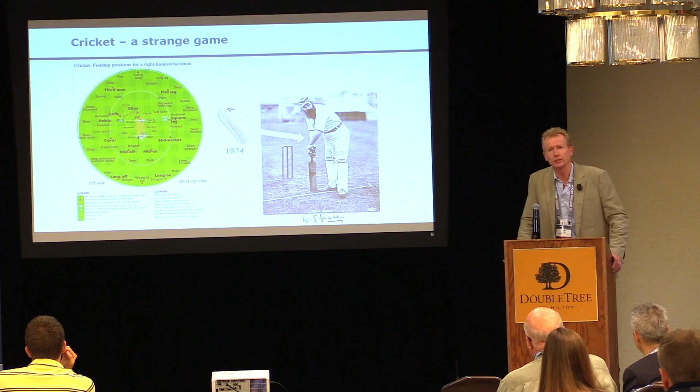Well, to give perspective on cold recycling, this cricket started — you can see the date down the bottom there — about the 1600s, the game first started. And it was only in 1874 that they decided to equip themselves with some protection, the cricketers. But what I'd like to highlight is that it took 100 years before they decided it would be important to maybe protect your brain as well.

It's a little bit like cold recycling: at the start of the technology, it was all about protecting the assets, and the assets were judged from an economic point of view. It's now that we've got our thinking caps on, and if we look at some of those earlier presentations today, it's fantastic to see the developments in research and implementation of the technology.

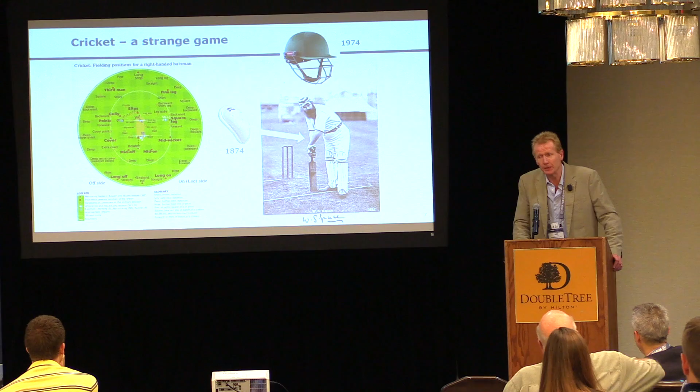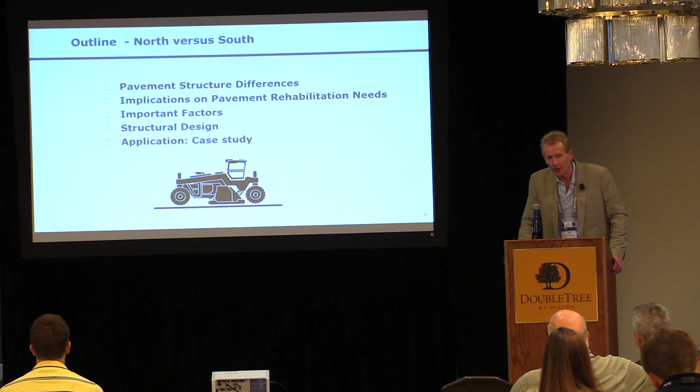So briefly, what I would like to cover is some of these bridging-the-gap issues, and these surmountable, I believe, challenges between the different regions.

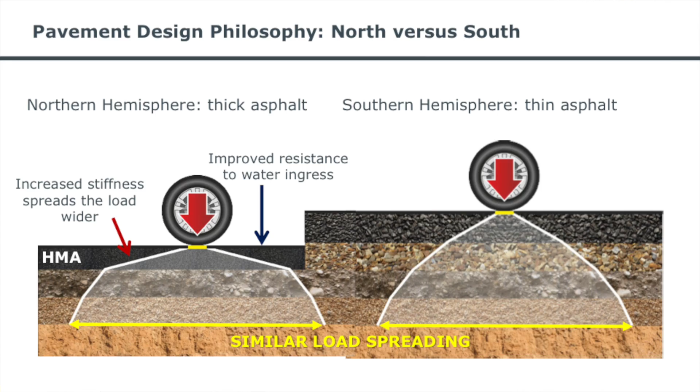One thing we know for sure is that developing countries, as South Africa is, typically have a distinctly different pavement structure to Northern Hemisphere countries like the USA, Canada, and European countries, where there's much thicker asphalt. There's good load spreading because you have stiffer layers, protection of the subgrade, and a slightly shallower pavement is possible. We know there's protection from moisture. So these are all very nice things.

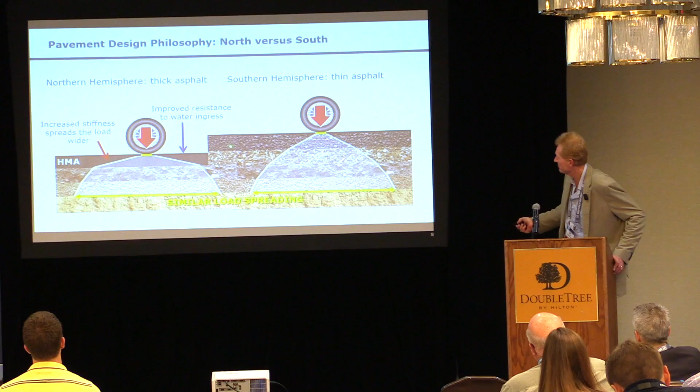But when it comes to rehabilitating these roads — and the picture on the right-hand side, although it does look like thick asphalt, that's meant to be a granular layer with only a very thin layer on top — that poses us with a lot of challenges in South Africa because maintenance is key. It's nice to see the research being done here with thin surfacings too. I'll show you an example of just how well thin surfacings can perform.

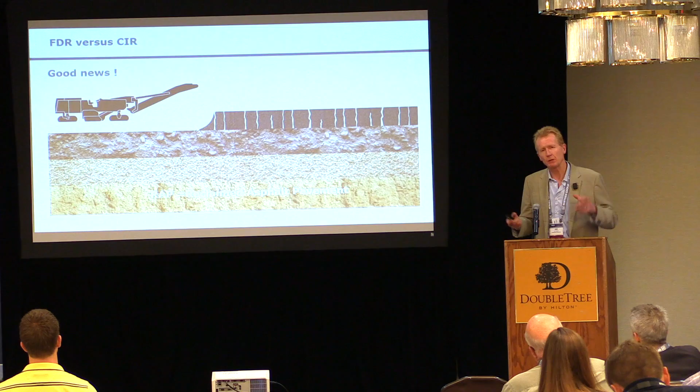So in this rehabilitation conundrum, we can consider pavements with thick asphalt surfacings or thick asphalt structural layers, and thin asphalt layers.

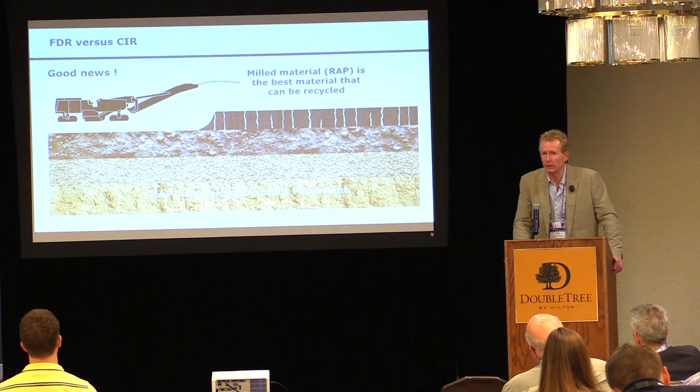One of the benefits is that this is a great material if it's used properly in the recycled pavement. So I gathered a little bit of information on some of the challenges and general comments of this technology and its application in the United States.

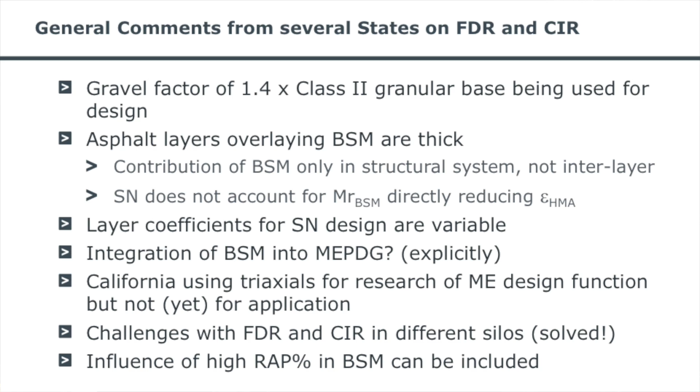I must say, with the benefit of this being my fifth ARRA and AEMA conference, one can see that there are challenges around the design system. There are some fairly simple design systems still using a structural number approach, which is very useful for the first level of design, but not that sophisticated.

One can have a factor for how much you've improved the layer's performance by using bitumen stabilization, or use structural number approaches where one can improve the structural coefficient of that particular layer. But that doesn't account for what stiffness and load spreading capacity you're building into the pavement, and how that benefits the surfacing.

There you need to go into structural mechanics considerations in terms of strains and stresses inside the pavement. Buzz explained it quite nicely in his presentation in terms of how important that is. The other thing, which I'll pick up later in terms of research, is how does one determine those layer coefficients?

I'm not entirely clear how cold recycling and bitumen stabilized materials are incorporated in MEPDG, and whether they are explicitly incorporated there. Maybe this research will lead to them being incorporated. I'm hoping that's the answer to that question.

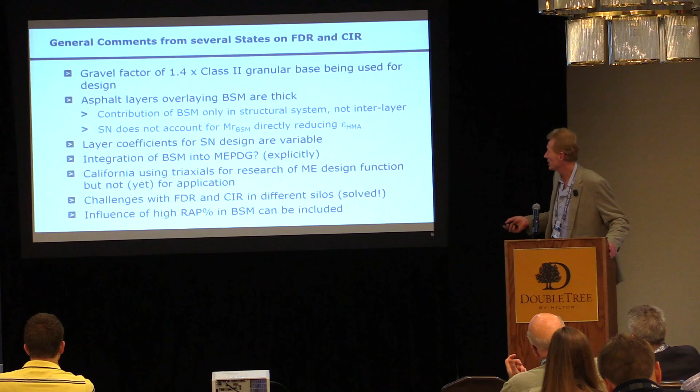There is triaxial testing being done to understand the performance properties of these materials, but really in the USA only on a research level, not in full implementation.

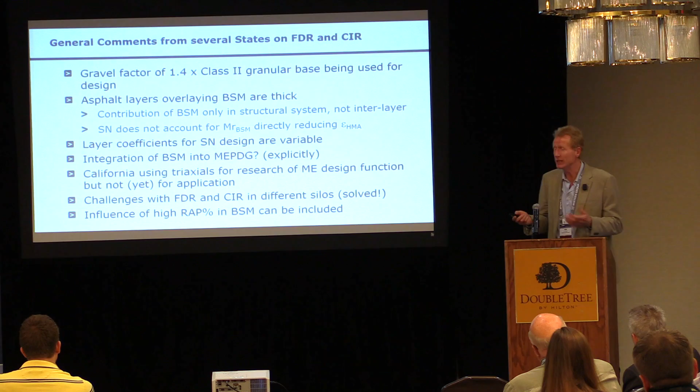Some problems have been solved where FDR and CIR have been treated as two separate materials, where I believe it's actually a sliding scale as you move from FDR into CIR with increasing RAP content. So this is an important thing we need to understand through research. And that basically covers the bullet down below.

In some of our early research, we looked at the performance parameters being the shear properties of this bitumen stabilized material, and I use that term generically. Whether it's emulsion or foam bitumen, we use the same evaluation tools, giving an equal footing to both technologies.

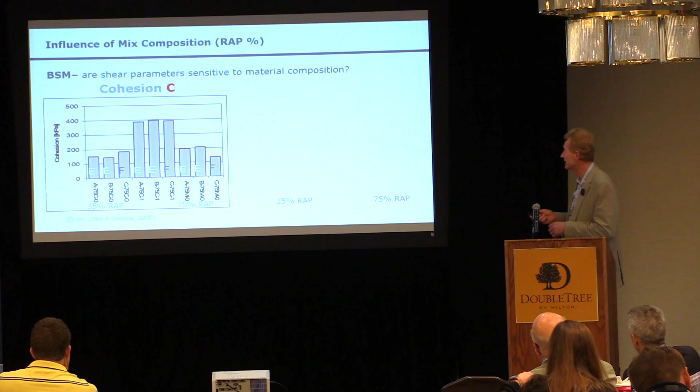So what one can see here is low RAP contents and higher RAP contents, and subtleties - these were two different emulsions and foam bitumen, that's the EEF. Those two don't have any active filler, and you can see what the active filler does.

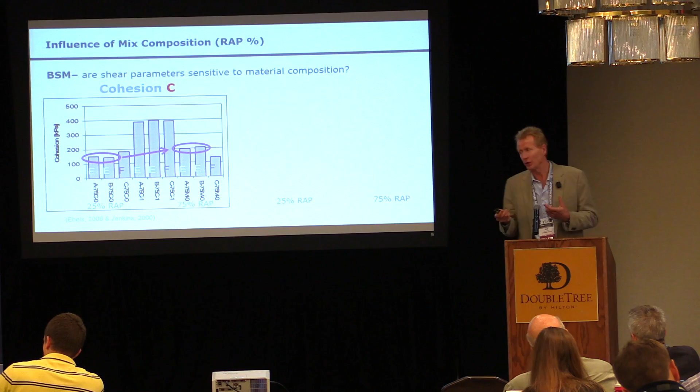But what I'm interested in more is between 25% and 75% RAP, one can pick up a significant influence on the cohesion values, as well as a slightly negative influence in using more RAP in terms of the friction angle. These things can be linked directly into the performance of these materials, and that's why triaxial testing is very useful, not just at a research level.

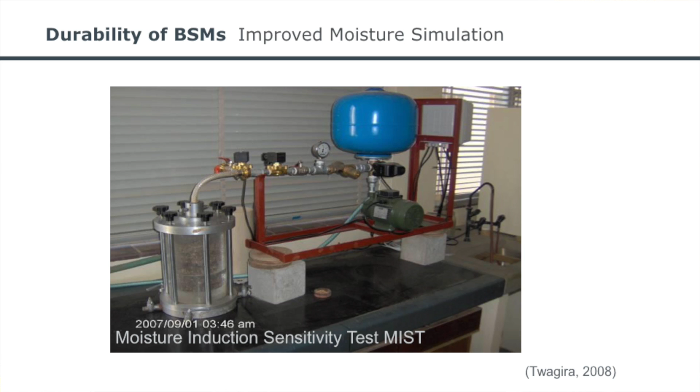The research that we have done continued also with these 12-inch by 6-inch diameter specimens, exposing them to pulsing of water at pressures of 145 kPa, for example, that can simulate hydrostatic pressures from traffic under saturated conditions. From that, we've also better understood the response and the performance of these materials.

How do they withstand moisture damage? Because that is a concern by many people, and a well-founded concern. We have to address how these materials can stand up to wet conditions and wet climates.

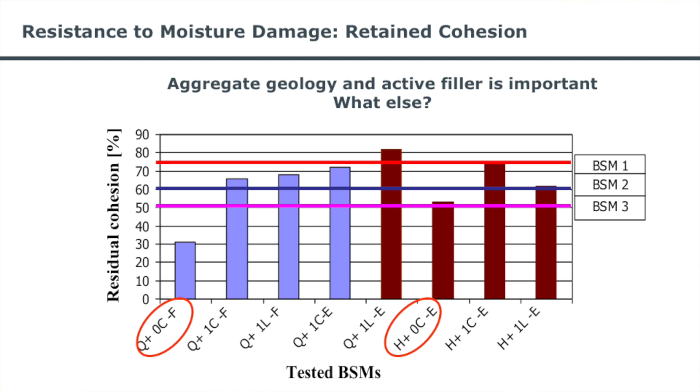Part of the research showing how we developed some limits for what is an allowable loss in cohesion from triaxial testing. That's somewhere along the lines of your TSR - what is your relationship with an ITS, wet and dry?

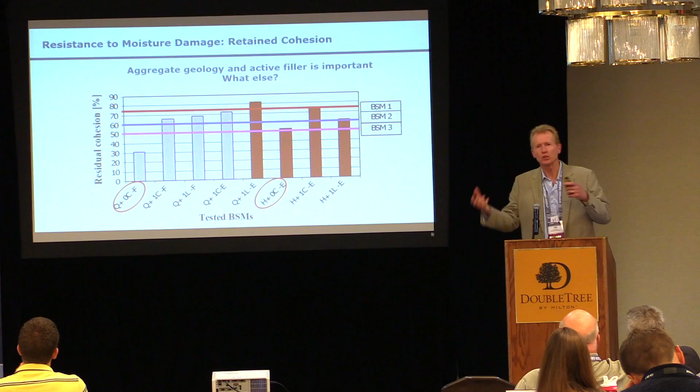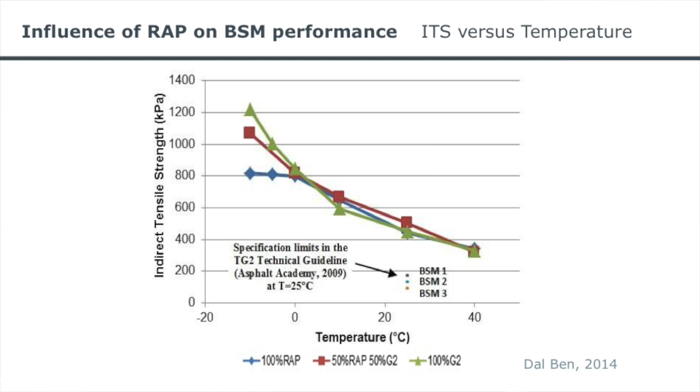Just a few slides on the testing of different RAP percentages. This is now another of our researchers who did his PhD on it. What I found interesting here is that, yes, the ITS value, similar to what Heukelom, the Dutch guy, did in the 1950s, showing how binder stiffness influences the ultimate strength of the mix for asphalts - but it's binder related.

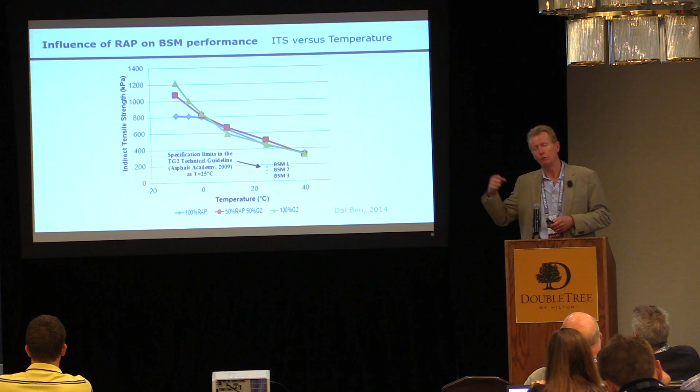You can see the temperature influence there, but the ITS is not really differentiating much between a mix that's got 100% virgin aggregate and 100% RAP, and another mix in between, a 50-50.

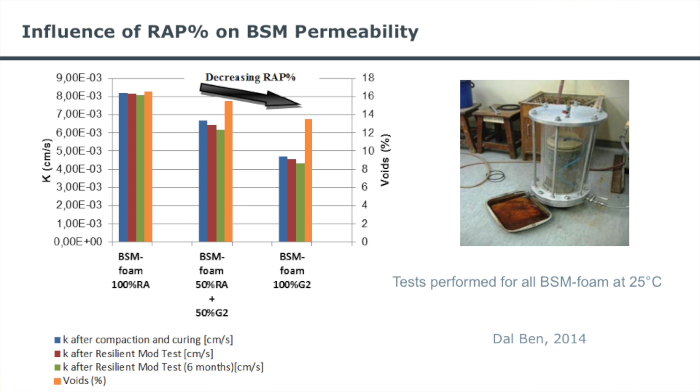What is also interesting out of this research was the influence of the RAP content on the permeability of the material. Decreasing the RAP content actually decreases the permeability, and it's all about the voids. These are different mixes over here, showing different types of pre-treatment of the materials.

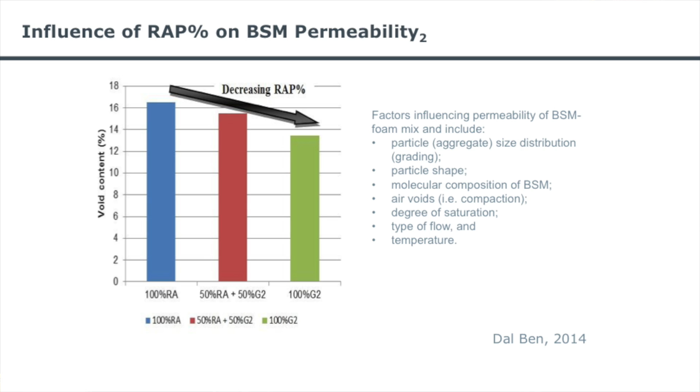The point is that the percentage of RAP does influence the permeability of the material. On the right-hand axis you can see it, focusing in on the voids. This is an interesting aspect of these special materials: even though the voids are pretty high - for those not acquainted with typical voids in a foam or emulsion mix where we're talking about 2 to 2.5% of bitumen, you'll be surprised to see these voids are above 12%.

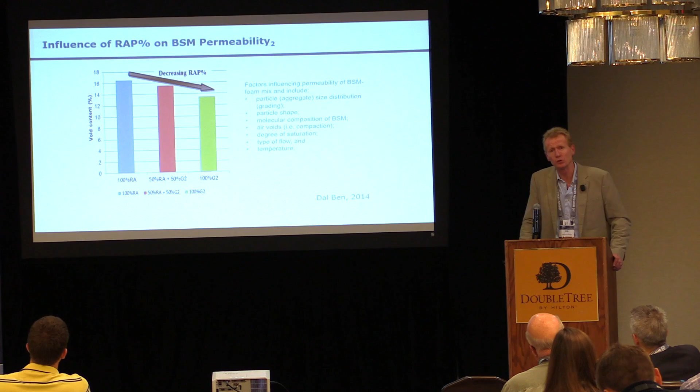However, many of those voids are not interconnected because of the dispersion of the binder in the mix. You'll notice on the previous slide that the permeabilities are still pretty low, and that's how these materials present their resistance to permanent deformation and moisture damage.

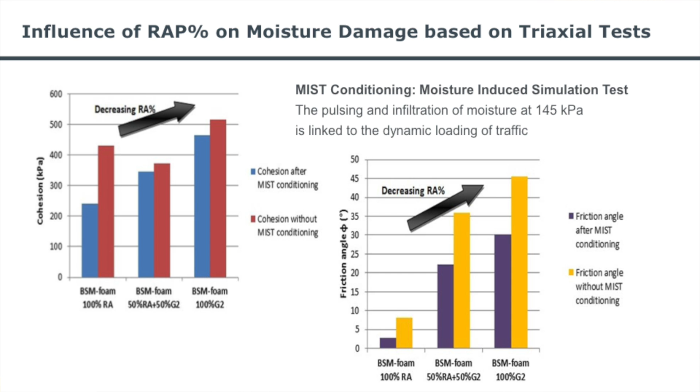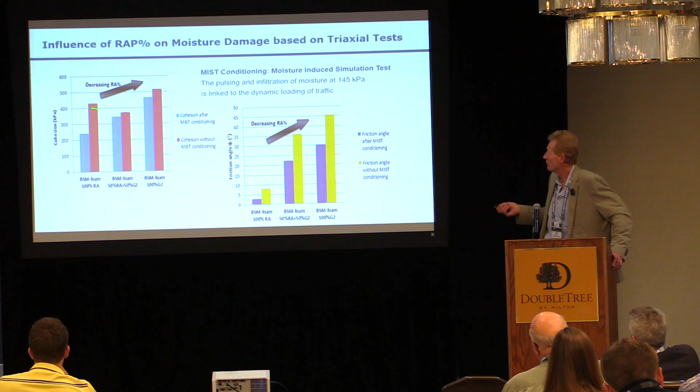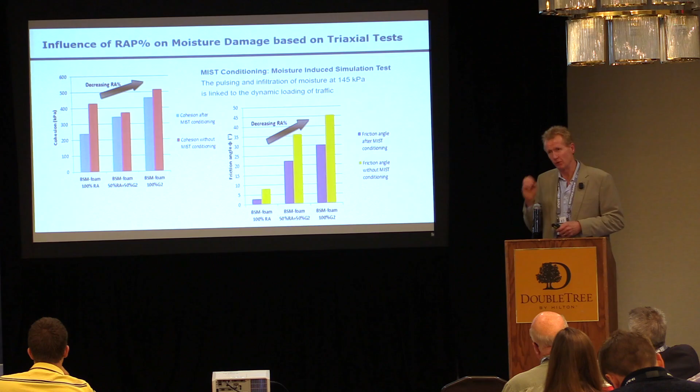Some other slides now - this is the same analysis, but looking at the cohesion of the materials with different percentages of RAP: 100% RAP, 50% RAP, and 0% RAP or 100% virgin aggregate. I'd prefer to look at the non-conditioning values, as this follows the trend of the previous results. What these results show us is that grading is an exceptionally important consideration. So if we're using 100% RAP or even 50% RAP, the gradation of that RAP and of the blend is extremely important, because ultimately it's the voids that are going to influence the permeability.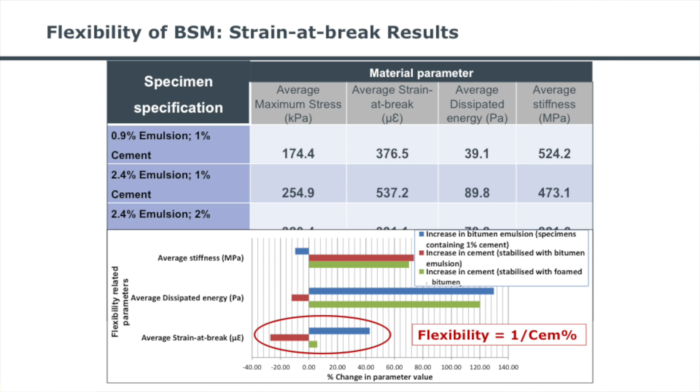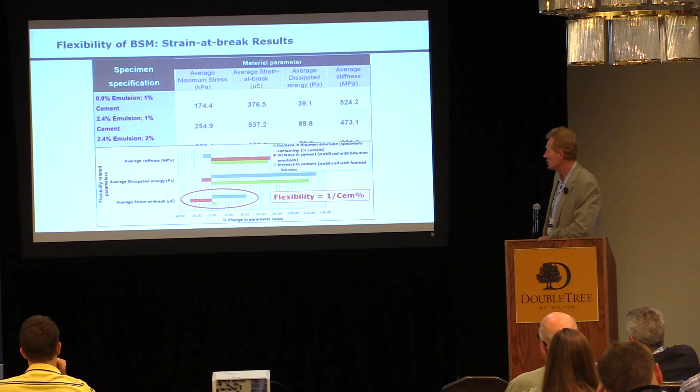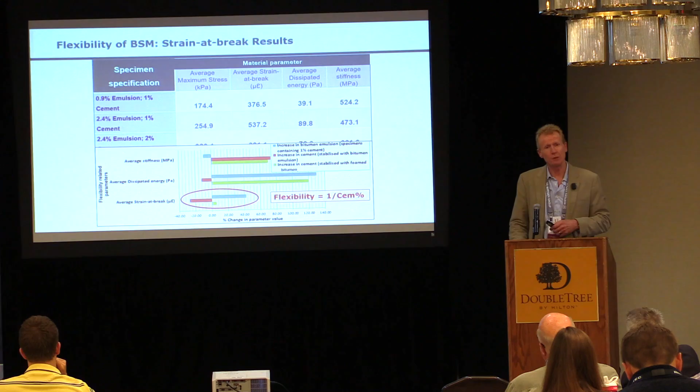But if we drop down, we found the strain at break to be a more reliable way of giving us insight into at what strain level the beam broke, as a surrogate for the flexibility of the material. With the original 1% versus as soon as you start adding 2% for the foam and emulsion, we see a significant drop-off in the strain at break - a loss in flexibility. So flexibility is the inverse of how much cement we add to these mixes, and we need to remember that.

Just to give you some insight into - again, Southern Hemisphere - that we're not only doing FDR type work, which has got a smaller percentage of RAP and more granular material blended into it, we also do some 100% RAP projects. This was one I was involved in with a colleague of mine, Dave Collings, a really challenging one.

Let me just go back there. So, São Paulo on the eastern coast of Brazil, the biggest city there, a very heavily trafficked highway that is also a concession, and the concessionaire was having headaches about maintaining it under extremely heavy traffic. I'll show you in a minute. They were looking for solutions because mill and replace was lasting only 6 months to a year maximum on these roads.

And there you can see what the problem is, just by this block cracking you see at the top, in combination with 15,000 heavy vehicles per direction per day on this highway. That's vehicles - you've still got to factor in axles per vehicle, which ranged between 3 to 5 standard axles per vehicle. The other challenge was working between 10 p.m...

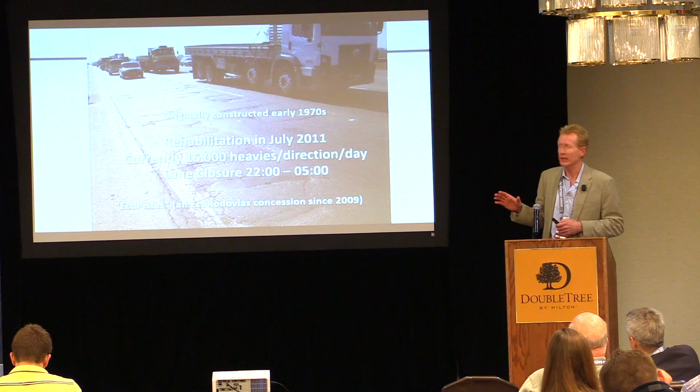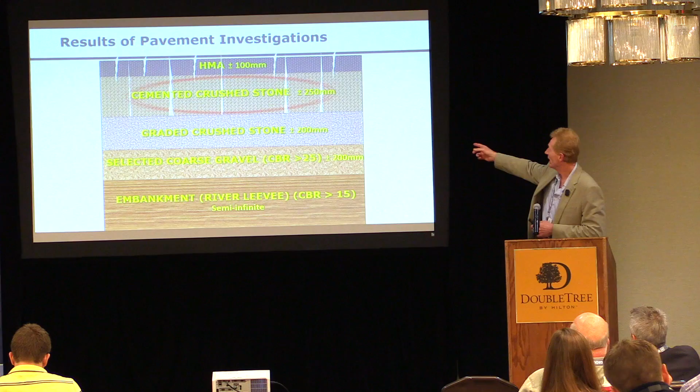This is the problem, so set the scenario. You've got 350 millimeters of cracked material. The problem is coming from a cemented crushed stone base that's been there for quite a while, with well-developed cracks. It was originally treated with 6% cement. Surprise, surprise, it cracked, and it's presenting itself on the surface like this, the block cracking.

So the problem's in the base, but it's still got 10 centimeters of asphalt on top. Obviously, you can't mill those two layers out and replace with hot mix asphalt in one night. It's just not going to cool down. And anyway, trying to compact 350 millimeters in lifts in one night is impossible.

So the process that we investigated was to mill off the cracked asphalt, the 10 centimeters, and mill off the 25 centimeters of granular underneath, keeping them in separate stockpiles. Then, as you would have seen there, take those blends from those stockpiles and compact them back into the box that you've created, in that 7-hour window, in 2 layers to get the compaction.

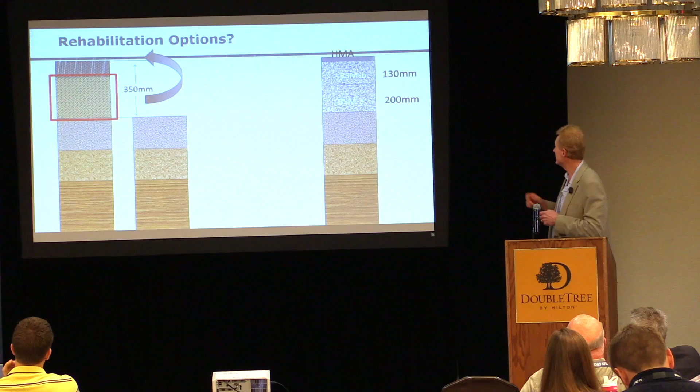So 20 centimeters compacted, paver laid in the box, compacted, overlaid immediately by another layer of 13 centimeters, and then that thin surfacing we were talking about on top. And then go to church and pray.

Because at 5 a.m., you're opening it to those 15,000 heavies in that direction. And if you've done anything wrong, it sure as hell is going to show up in the first day.

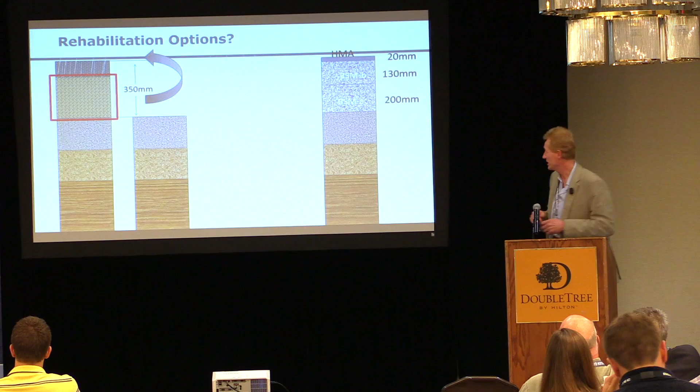So it challenged us also in terms of practicalities, that's one thing. The other thing is designing those layers. How does one design this pavement structurally? We don't really have the tools to do that.

What was also planned is that the concessionaire was concerned about this pavement being a bit too thin on top in terms of asphalt. So after trafficking it for a while, after several weeks, they wanted to mill and replace with 50 millimeters of asphalt.

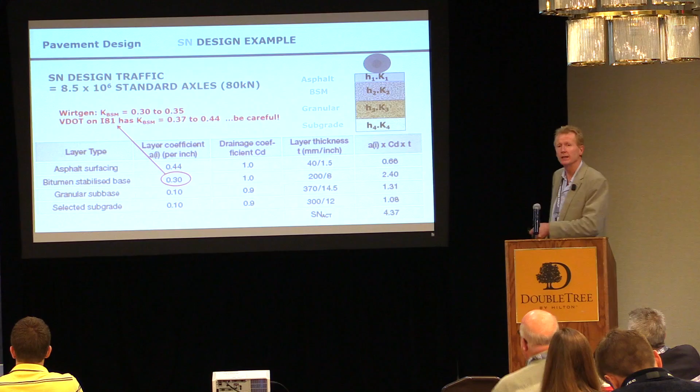Well, these design functions, coming back to using a structural number approach - there are different, this is where the variability in these layer coefficients comes in, and they've all been properly verified. The variability is as a result of differences in the material.

And as we heard earlier, there are some fantastically performing BSMs. But this, unfortunately, doesn't really tell us much about the support for the surfacing layer and how that's going to have a reduction in fatigue as a result of improved support.

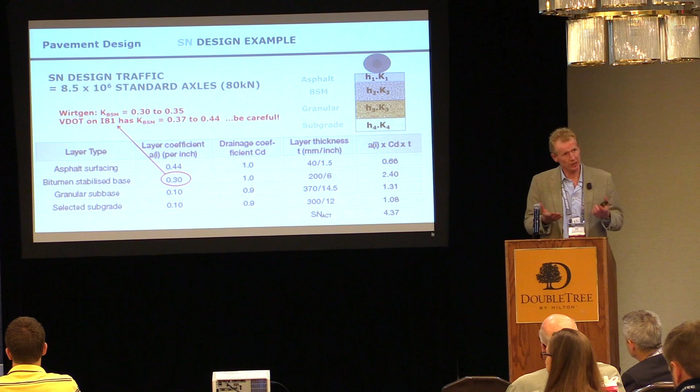So I believe this was one of the signs put up on one of those trial sections that performed so wonderfully. And that was quite far from the truth, I reckon, warning of risk of sudden catastrophic sinkhole collapse, because the road is still there as if it was built yesterday, I believe.

Anyway, so the design system that we have gone for, that's now formed part of a mechanistic empirical approach coming from the Southern Hemisphere - but I think this is applicable all over - is to analyze what are your stresses in the pavement. Stresses, not strains, with this material, because it's got this non-continuously bound nature, a little bit granular.

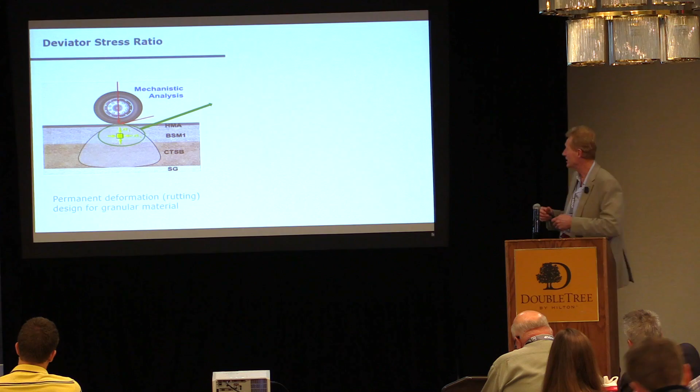Take those stresses, plot them together with your strength of material. So you can do triaxial tests to get that design envelope. These are your actual stresses over there, the green Mohr circle, and the ratio of that Mohr circle and the blue one, which is the failure Mohr circle.

If you look at the deviator stress ratios of the two diameters, that ratio as a percentage is going to indicate to you how quickly the rutting takes place. So at a low deviator stress ratio, if it's 30%, you're going to get some settling in, embedment in the beginning - shakedown, whatever you like to call it - and then it's going to flatten out.

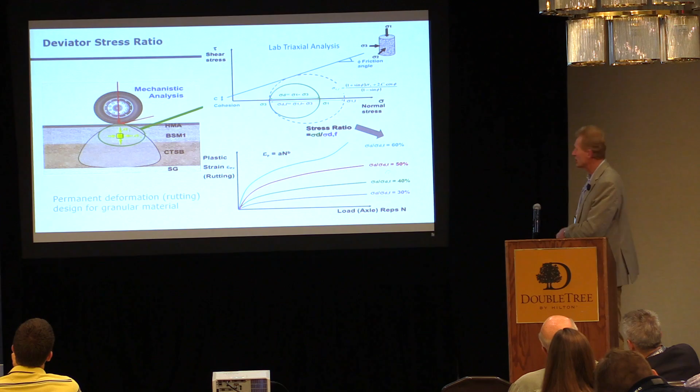There will be an increase, a slow increase over time. But if you can restrict that deviator stress ratio, you're going to get the right sort of performance, and you're going to limit the permanent deformation.

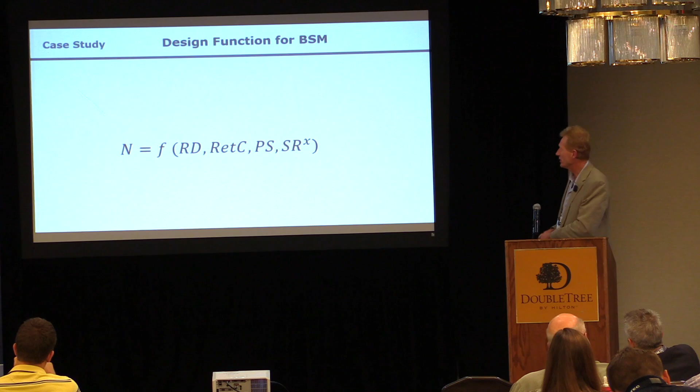So the architecture of this new design function is based on the design traffic - how many axle repetitions the material can handle. The CBR or FDR is a function of the relative density of the material.

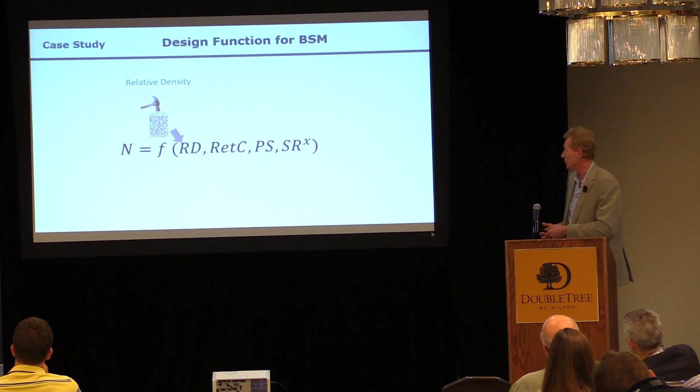These are the key variables that have come out of the research: the plastic strain percentage, what is your tolerance in terms of how much permanent deformation is allowed at the terminal condition; the retained cohesion, which comes out of how much cohesion you have remaining in the material after exposure to moisture damage; and finally, that deviator stress ratio. So those are the four components.

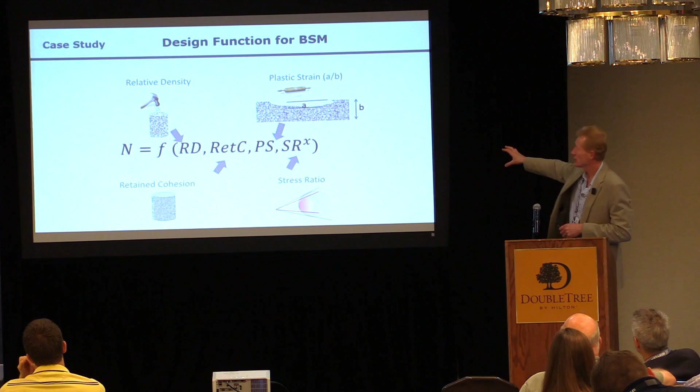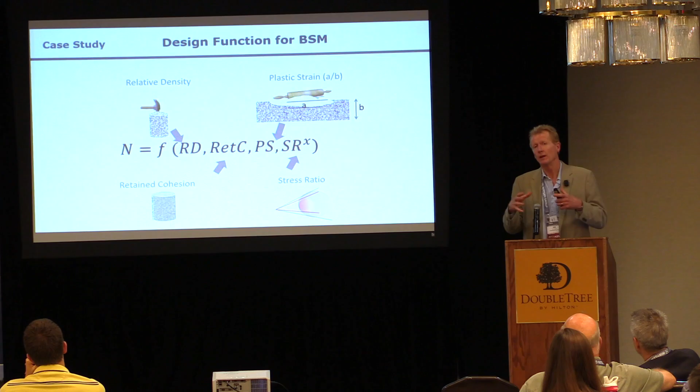As you can see, that stress ratio is a power function. We've developed that function with coefficients. I got it two days ago from one of my students evaluating the whole final report on it. This is the type of function we're using in that project, and this is the type of output that we get.

So just to emphasize the point, we, and I say we, the industry, have the know-how to use this type of analysis. You can see that the blends used on that Ayrton Senna highway in Brazil were different. One reason was with the extremely high traffic and thin surfacing, we wanted a bit more friction angle in the mix. So the 100% RAP is all part of that, well, it was 300 millimeters ultimately in total of bitumen stabilized material.

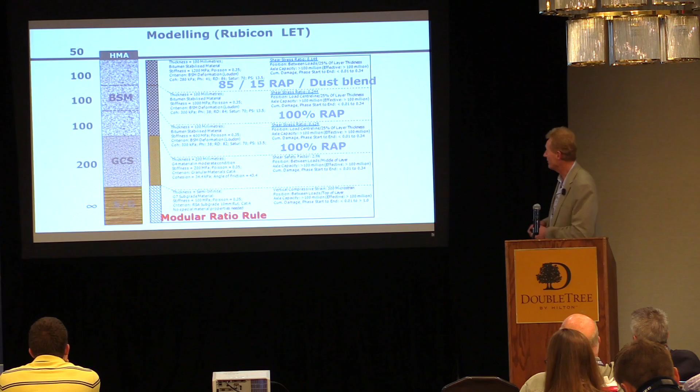We can see from this analysis that those deviator stress ratios are less than 25%. So this design was put in place to deal with really heavy traffic. We also moderated the stiffnesses achievable in the material. As we can see there, with the support of 200 MPa on a graded crushed stone, which was the in situ material in that Ayrton Senna highway, we could easily develop the stiffnesses required to carry the traffic.

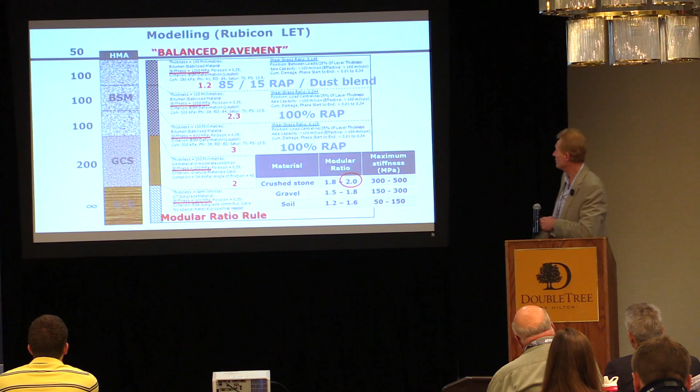If one looks at the modular ratios, the ratio of stiffness between two adjacent layers, which is a fact of nature, you can't have an extremely stiff material on an extremely soft material, that plate of glass on the feather bed type of scenario. This type of balanced design helps reduce those ratios of stiffnesses, as we can see in the red values, and they meet the requirements of nature, let's say.

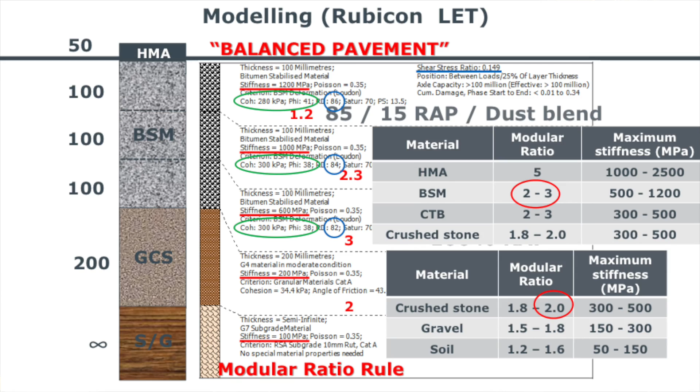You will also see that in this type of design, one can explicitly use the material properties evaluated for the materials. Here you can see where you have some crusher dust, you get a slightly higher friction angle than the mixes, so it's 41 to 38. It might not seem like much, but that could be the difference between pass and failure in terms of performance, as well as the cohesion values. So these are measured values, and I'll show you a few in a moment.

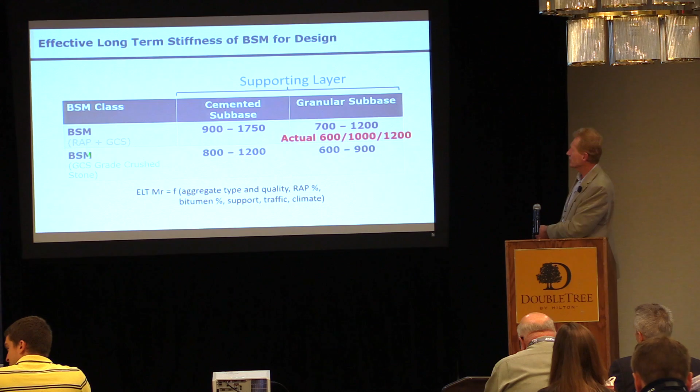In terms of our general guidelines for mechanistic empirical design, you can see the red values depend on what type of supporting layer. That's the subbase, and this is your base layer, your bitumen stabilized material, with RAP and graded crushed stone or more graded crushed stone. So this would be the CIR heading more in this direction, and there you can see the range of values we used in the design fit right into that scenario.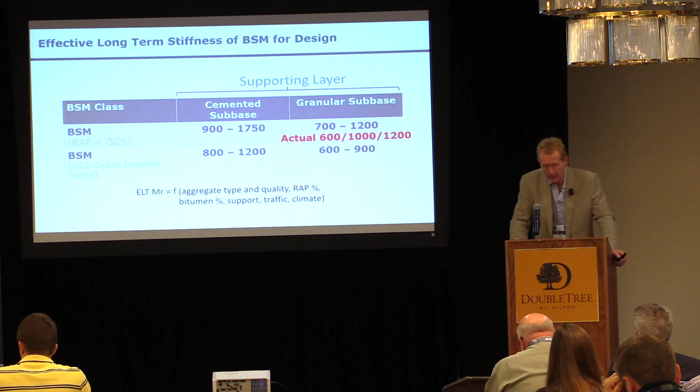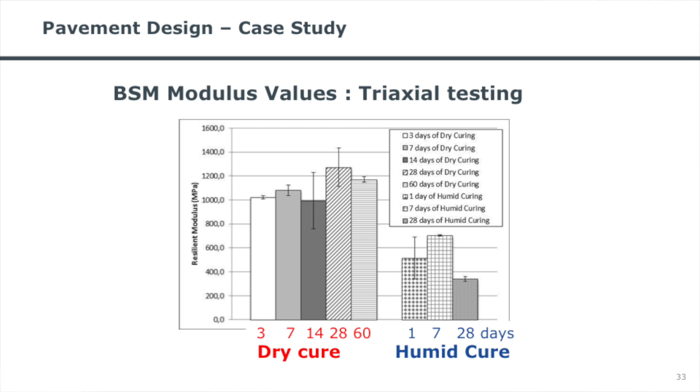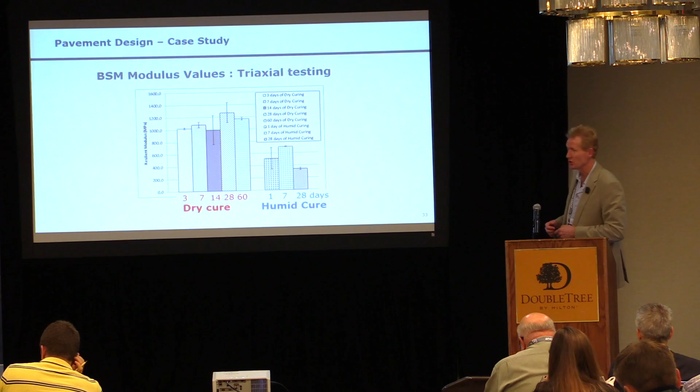Some of the values that came out of that particular project, here we can see the resilient modulus values. Actual values were actually higher; we were conservative going down to 600 megapascals in the design, but rather be on the safe side. This was a dry cure. A really humid cure, if you don't allow the moisture to come out, can create entrapped moisture and reduce the stiffness of the material significantly.

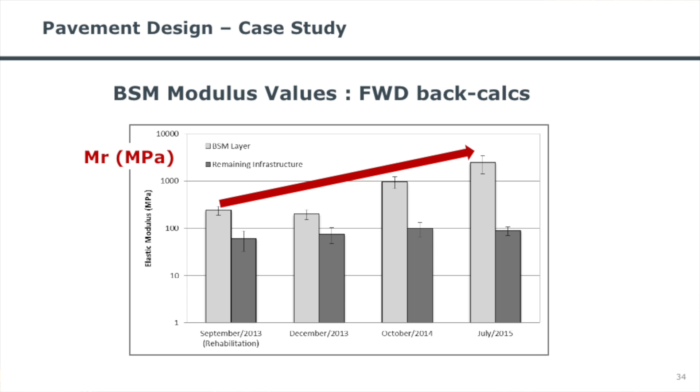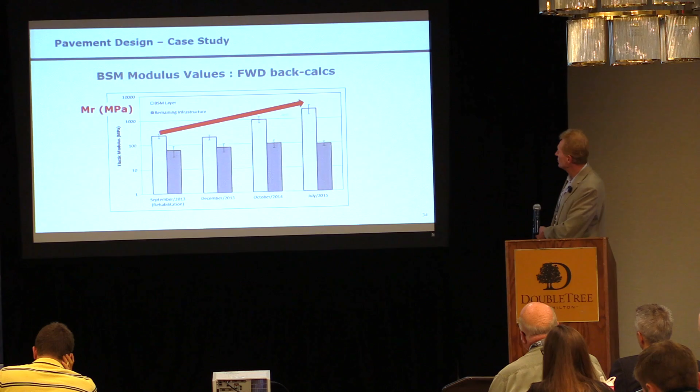In terms of back-calculated resilient moduli, you can see that over time after construction, even under traffic, one would expect the traffic to damage the material, but actually the curing dominates the behavior of the bitumen stabilized material. You can see an increase to well over 1,000 megapascals of stiffness in the material. This helps us as a benchmark project to understand what design limits we should have for future projects.

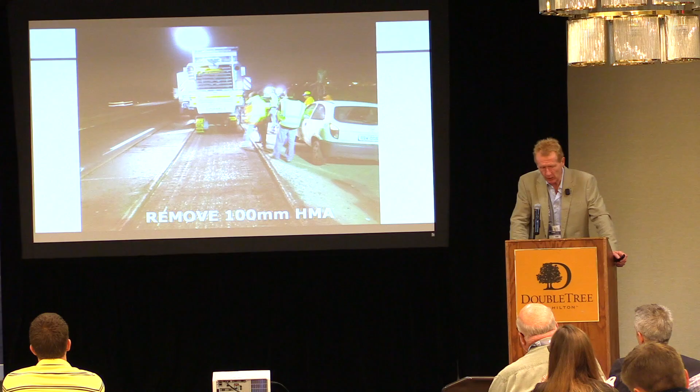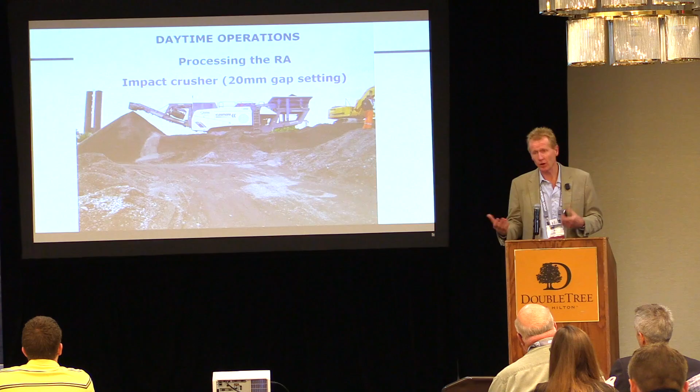Just a few slides on the project itself. This would have been taking off the 100 millimeter surfacing, milling it, then taking it to the local stockpile. As I mentioned earlier, the gradings are exceptionally important. Single stage crushing, specifically with an impact crusher, works better than a jaw crusher or a cone crusher, which tend to push RAP material together. If you're working with RA type material in an in-plant process, as in this example, you don't want to create clumps of the material, and you want a very smooth, continuous grading.

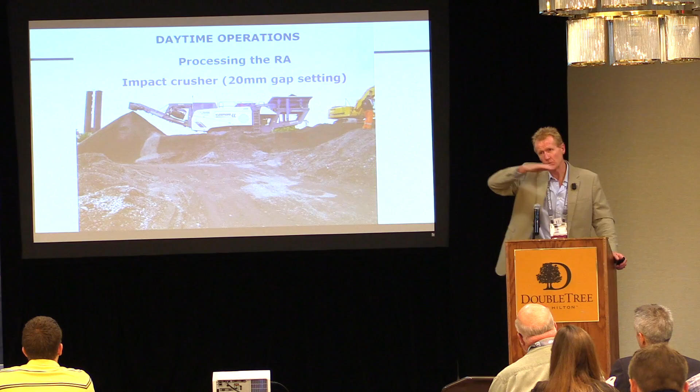That's imperative. And then there's the ability to blend in the mix that RAP and whatever other components you require, both in terms of lime or cement and the amount of bitumen. As you can see, the more RAP you have, the slightly less binder you need in the mix. You can see a difference between 2 and 2.1% of binder, and in a big project, that is significant.

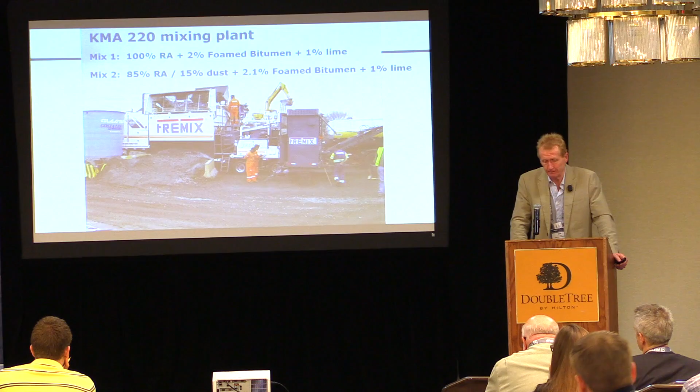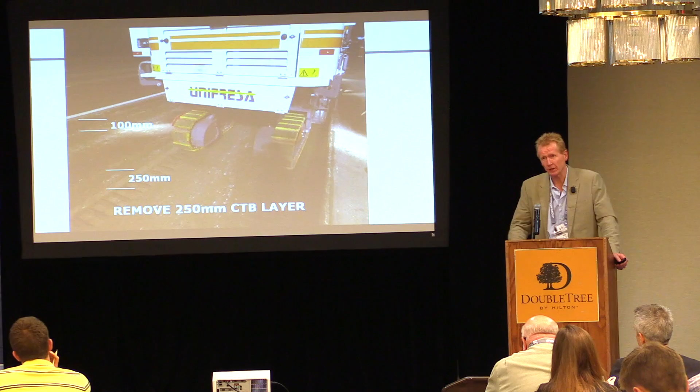This is the second part of the first stage of the operation. There's the second cut, through the cement treated, cracked existing base layer, into a separate stockpile. I've left out, unfortunately, they're all night shots, but the paver laid 2 layers of bitumen stabilized material, compacted, then the final surfacing and opening to traffic.

That was in 2011. This concessionaire was really concerned about how to control this problem, and the original trials were in a 500-meter section. This is a couple of years later, and you can see the rehabilitated lane is showing no signs of distress. I was there 7 months ago, then 3 months ago, and it's still looking in that condition.

But subsequently, the lane alongside has also been rehabilitated now, and we're 6 years into this rehabilitation. The concessionaire has got the contractor so well trained up into it, they're just going section by section and systematically treating the problem. So with the right design, the right materials, and the right implementation in terms of construction, this is the type of solution one can come up with using this technology.

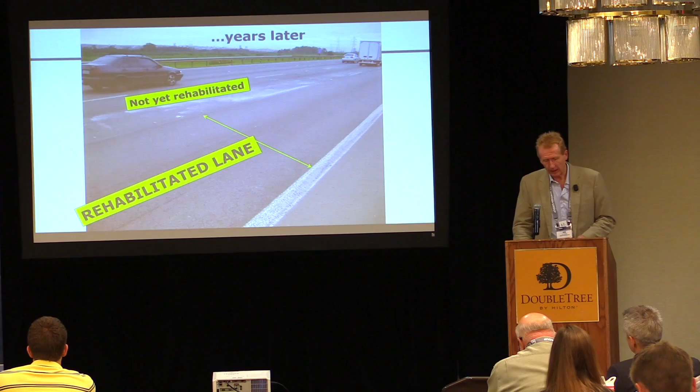And I should just say that ARRA has kindly given me another slot tomorrow to talk a little bit about the mix design procedures, and I'll explain how those specimens are prepared and tested and how that is all evaluated.

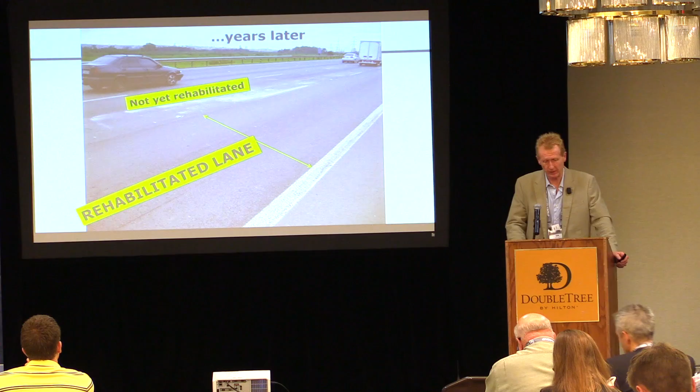So, Mr. Chairman, I'd like to conclude in saying that there's a lot more attention being paid on the investigation of these projects, particularly controlling the grading of the RAP, etc. The mix design system is available and in place for these materials, with much better insight into the performance properties that should be carefully looked at. The design takes into account climatic conditions and critical conditions, curing and exposure to moisture.

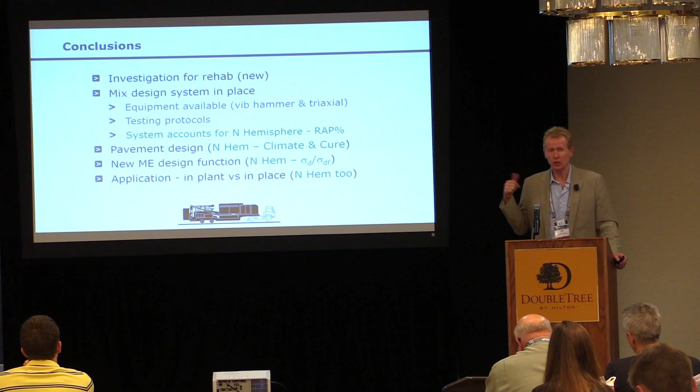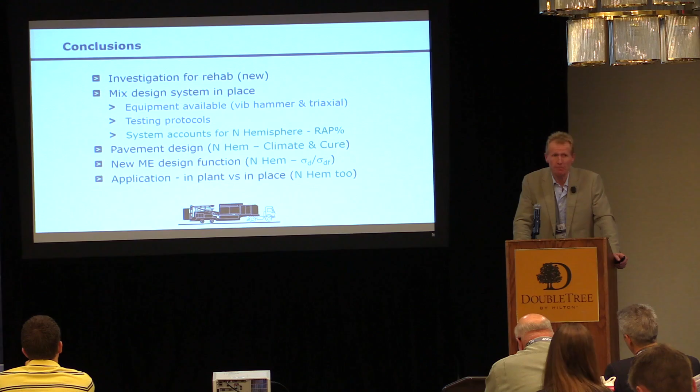We have to be real about these things. And the design function will be published. The one that I showed you is an interim one, but the architecture is exactly the same, with a few minor nuances and changes. Both processes have their place, and we saw it earlier in terms of the performance in plant and in place. Properly implemented, I think, can get the right results. Thank you for your attention, and I'll be happy to take any questions.

Yes, John Martin. So I hope everybody can understand me. So you're looking at this material as an unbound material with a component that allows you to increase cohesion from the bottom to the top. Did I understand that properly?

Yes, okay, so first part is it's like an unbound material on steroids. I mean, it's just unbound, still got the friction angle, but the cohesion is significantly higher. We're talking about, with an unbound material, you might have 35, 50 kilopascal. Here you've got 250 kilopascal upwards, that's the cohesion. But coming back to your other part of the question, those values would not necessarily, on that particular project, they did change from the bottom to the top, but one can also design it in one layer as a uniform cohesion and friction angle.

The reason I'm asking is if the top material was placed right on top of the natural soil, that material would not have the same properties. Exactly. That's where the modular ratio comes in. You will see that we check the modular ratio. Do you have a realistic stiffness?